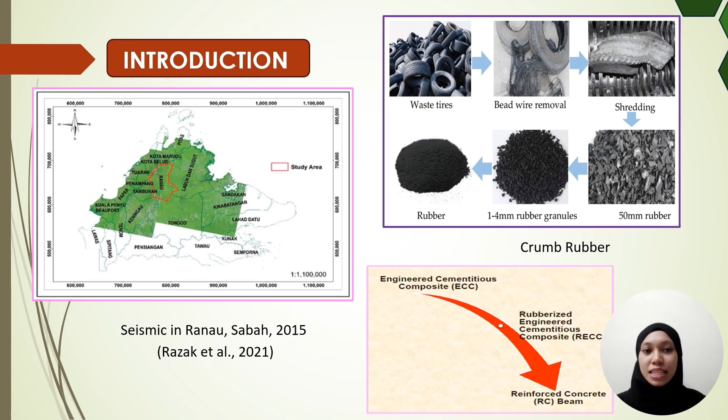On 5 June 2015, an earthquake struck Ranau Sabah, emphasizing the need for resilient structures. R-ECC, a variant of ECC incorporating rubber, enhances toughness and is ideal for retrofitting applications. Problem statement, current issues. First, a structural failure at the beam column junction is a critical and delicate area that has the potential to destroy a building. Second, since structure performance, not strength, is the basis for current dynamic loading, designers are forced to strike a balance between structural ductility and strength.

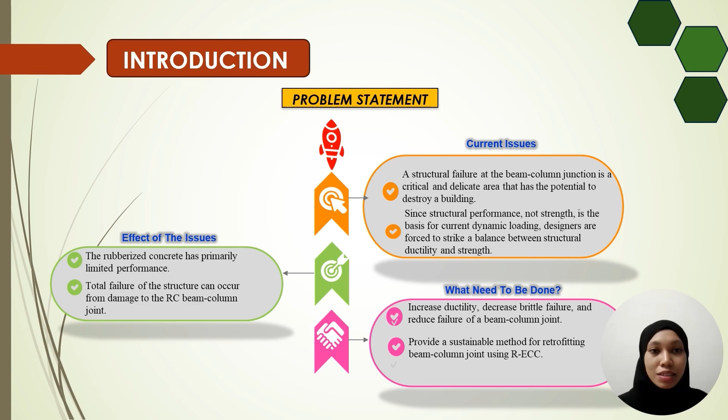Effects of the issues. The rubberized concrete has primarily limited performance. Second, total failure of the structure can occur from damage to the RC beam column joint. So, what needs to be done? First, increase ductility, decrease brittle failure, and reduce failure of a beam column joint. Second, provide a sustainable method for retrofitting beam column joint using R-ECC.

Research question and hypothesis. First, what is the crack pattern of RC beam column joint retrofitted with R-ECC jacketing subjected to lateral cyclic loading? Second, how does the load displacement of RC beam column joint react when retrofitted with the R-ECC jacketing subjected to lateral cyclic loading? Third, how effective is the application of R-ECC jacketing as retrofitting material on the structural performance of RC beam column joint?

For hypothesis, first, the use of R-ECC jacketing mitigates and controls the development of cracks in the beam column joint, leading to better overall structure performance. Second, the RC beam column joint structure performance increased when retrofitted with R-ECC in terms of its high ductility, cracking behavior, deformability, and energy dissipation. Third, R-ECC having high ductility, equivalent viscous damping, deflections, and energy dissipation can improve the structural performance of the RC beam column joint.

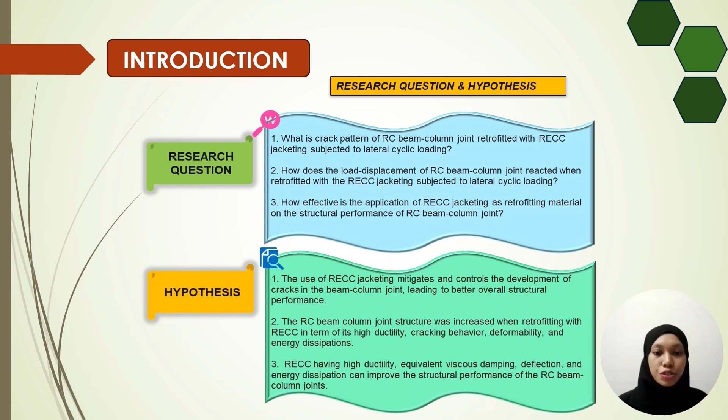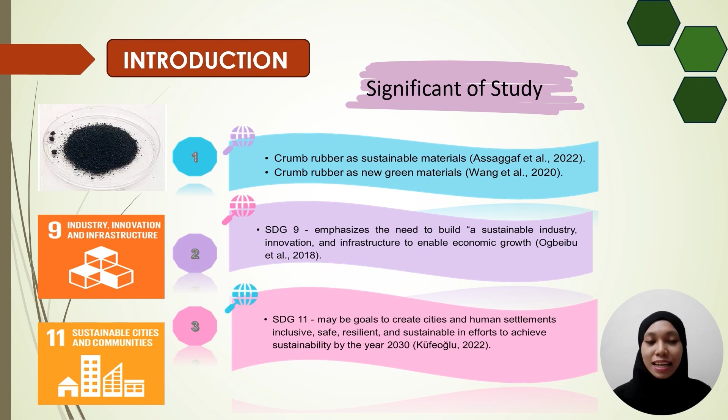Our objectives are to investigate crack behavior, evaluate load displacement response, and analyze the ductility and equivalent viscous damping of beam column joint retrofitted with R-ECC jacketing. Significance of study. In this research, using rubber aligns with Sustainable Development Goals SDG 9 and SDG 11 by promoting green materials and sustainable construction.

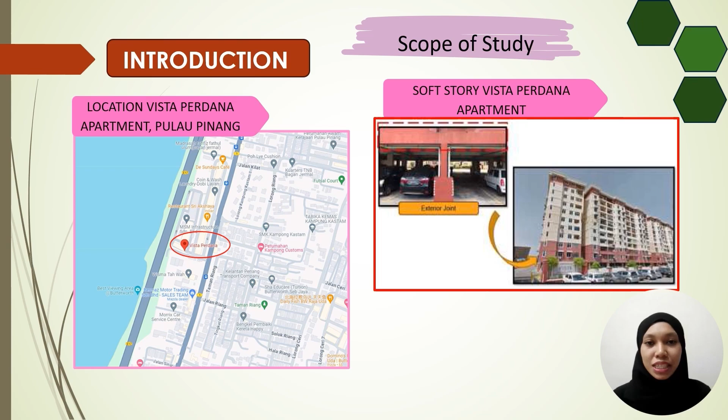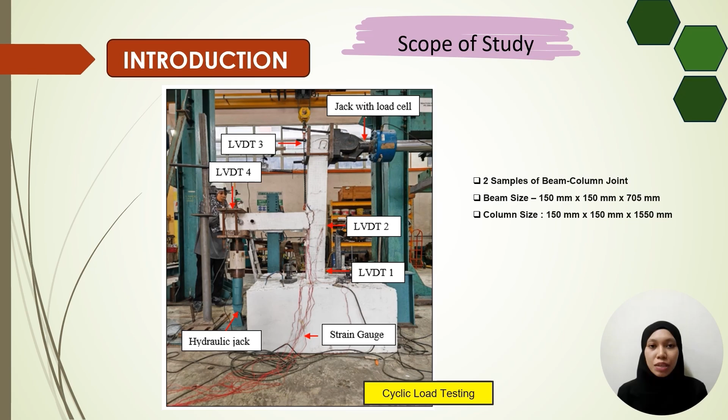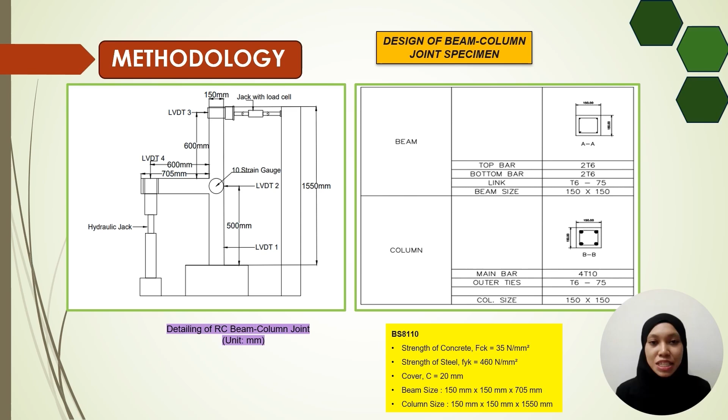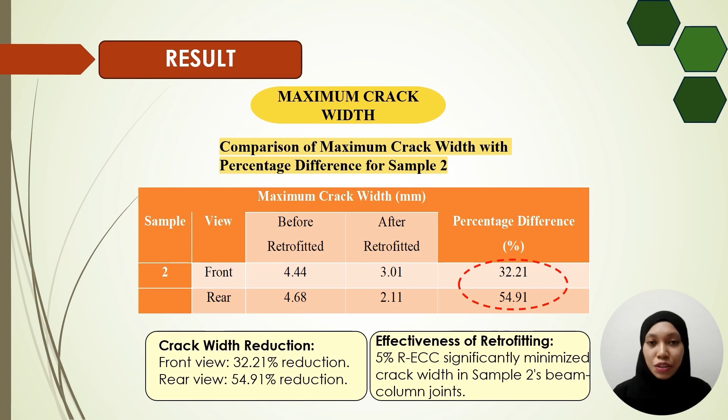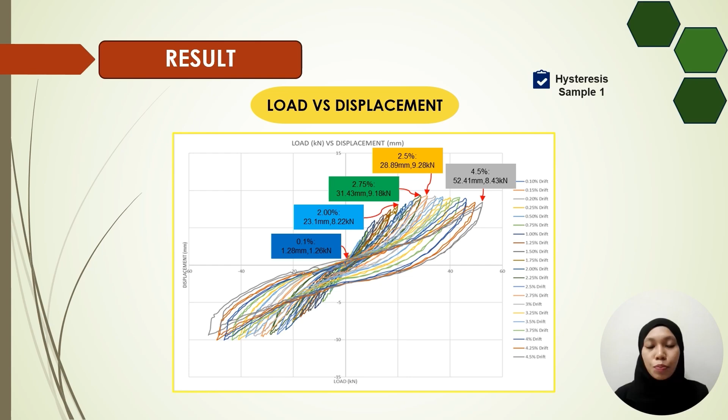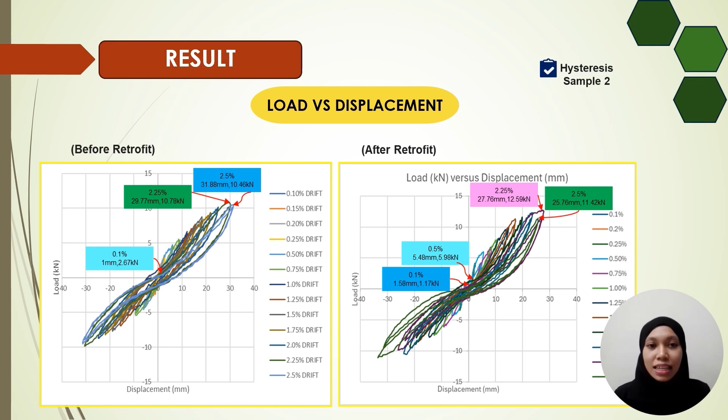Result for sample 2 load versus displacement. The slide shows the hysteresis of sample 2 before and after retrofitting. Before retrofitting, sample 2 showed cracking at 0.1% drift and stiffness loss at 2.5%. After retrofitting, it exhibited delayed cracking, reduced stiffness loss, and improved performance. The next result is for ductility. Retrofitting enhanced displacement ductility by 7% in the pushing direction, improving the joint's ability to withstand loads.

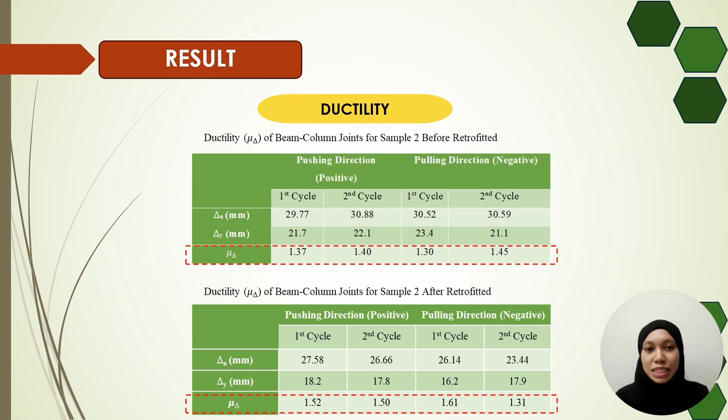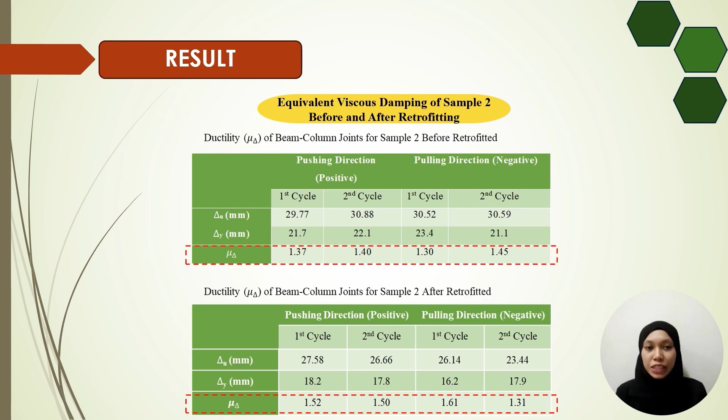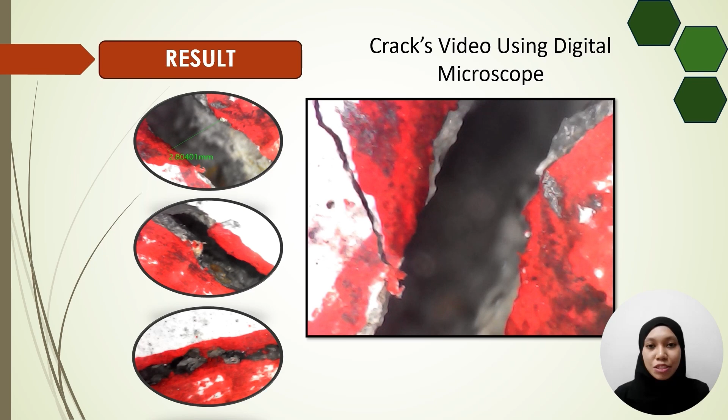Next result for equivalent viscous damping of sample 2 before and after retrofitting. Equivalent viscous damping was improved with retrofitting, making the joint more resilient under cyclic loading. The slide shows a crack video using digital microscope. This video demonstrates crack behavior under load. Retrofitted joints show reduced crack propagation during testing.

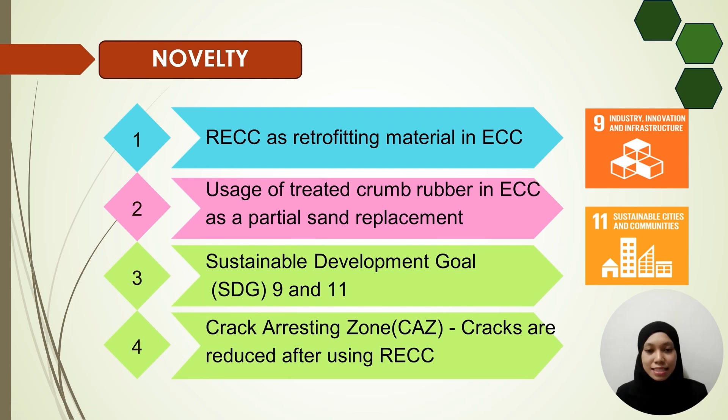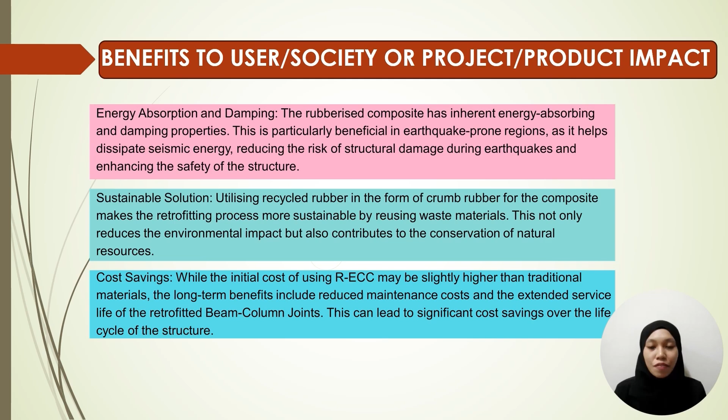Novelty of this research: first, R-ECC as retrofitting material in ECC. Second, usage of treated crumb rubber in ECC as a partial sand replacement. Third, Sustainable Development Goals SDG 9 and SDG 11. Next, crack arresting zone CAZ. Cracks are reduced after using R-ECC. For status of innovation, our research is currently at TRL4 with ongoing efforts to achieve TRL5. Benefit to user, society, project, or product impact. R-ECC offers improved energy absorption, sustainability, and cost savings in the long term, especially for earthquake-prone regions.

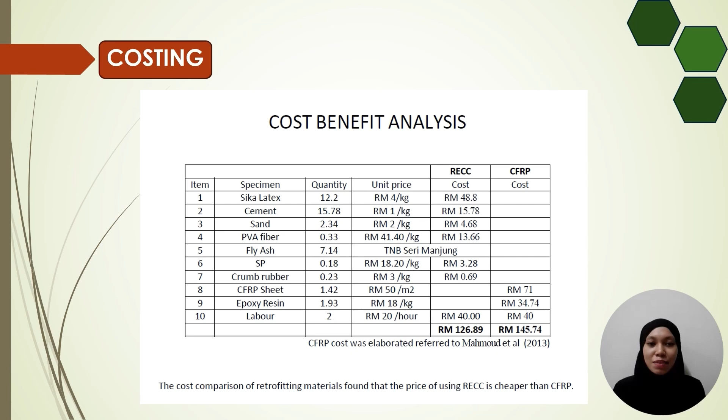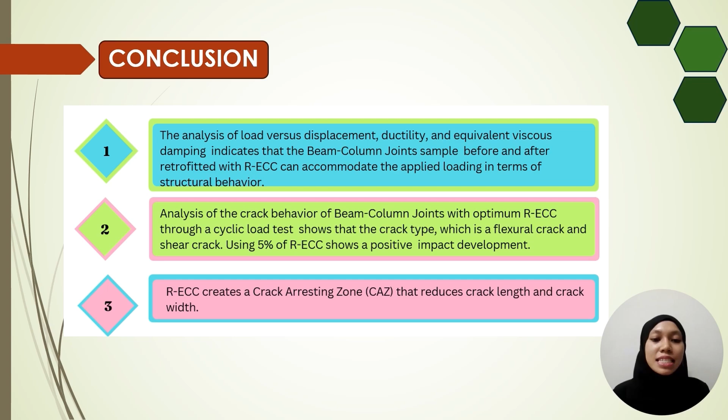Cost-benefit analysis. Cost comparison shows that R-ECC provides better value over time compared to CFRP. Conclusion. First, the analysis of load versus displacement, ductility, and equivalent viscous damping indicates that the beam column sample before and after retrofitting with R-ECC can accommodate the applied loading in terms of structural behavior. Second, analysis of the crack behavior of beam column joint with optimum R-ECC through a cyclic load test shows that the crack types, flexural crack and shear crack, using 5% of R-ECC show a positive impact. And third, R-ECC creates a crack arresting zone CAZ that reduces crack length and crack width.